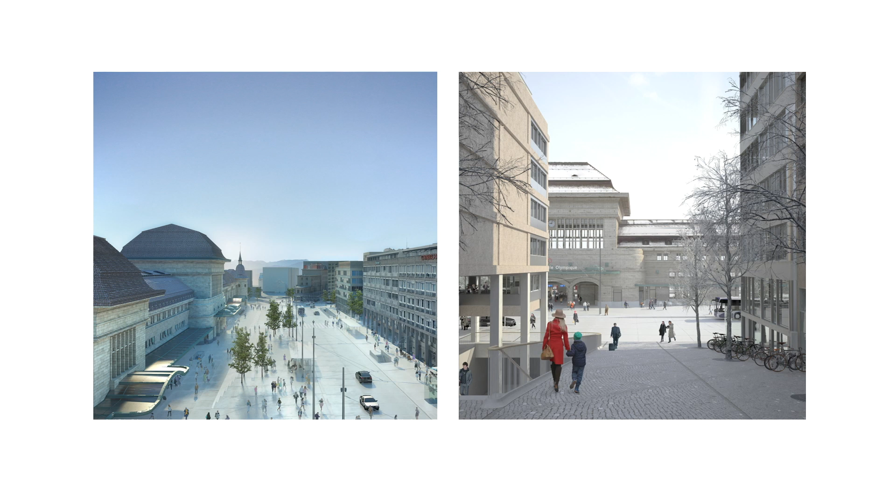It's a subject in Lausanne. This city has many slopes, and we wanted the square in front of the train station to be a flat place, because programs and developments are different when the ground is very horizontal, very flat. So it's not just about moving, it's about other uses that are not linked to mobility.

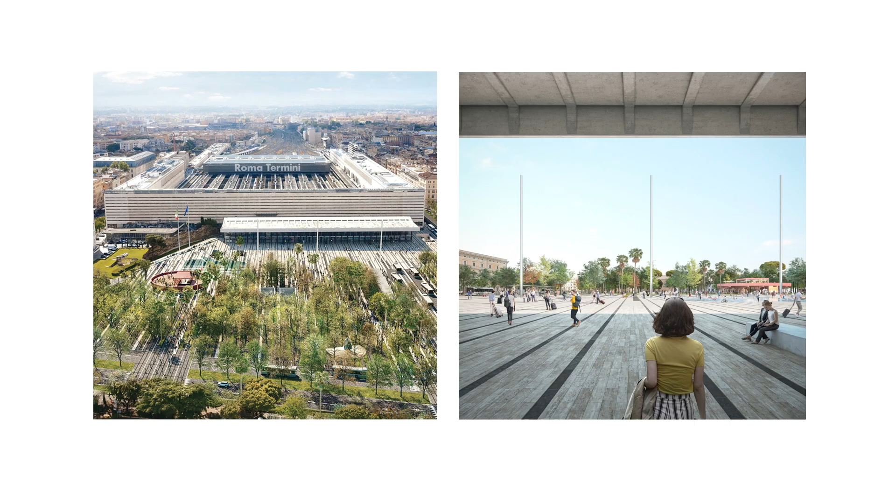A second example, here in Rome, again the square outside the train station, and there's also here an idea of horizontality, flat space, and integrating nature in these public spaces, because they are connected to the nature, to the ground, to the soil, and to the sky. It's about creating specific climates, and we've often talked here and with the SGP to highlight both the social and the environmental role of public space. When you build buildings or infrastructure, there can be very high costs, but for public space it's not the same cost at all.

And finally, with a few images, two different projects in Paris.

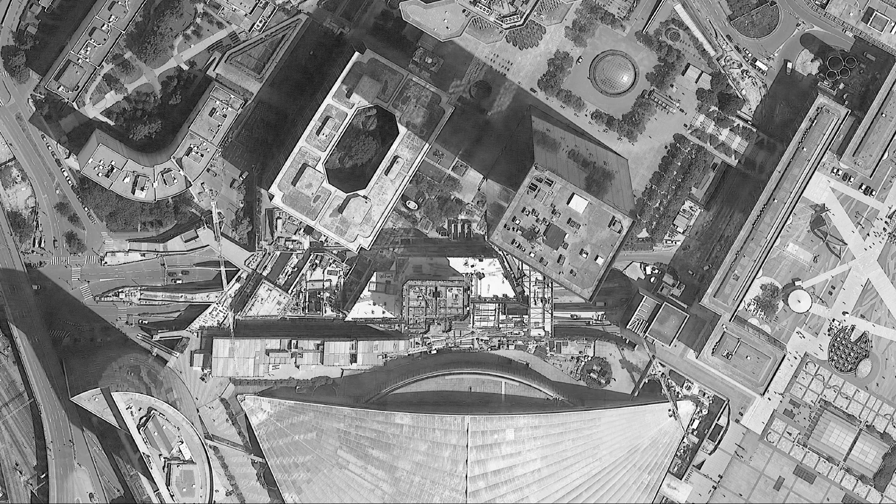When I was called upon for this project, I really pondered about the general environment over there, and I thought: in order to really understand reality as an actual place, it really reminds me of mountains and rocks. It's all rocks, everything reflected from one mountain to the next. It's all rocks and greenery.

I really enjoy hiking in the mountains, and when you're hiking, it all depends whether you're under a tree or not. If you're under a tree, you have shadow, but once you're no longer under trees, you no longer have that shelter. And I thought, perhaps we can transpose this and have a kind of tree line in La Défense.

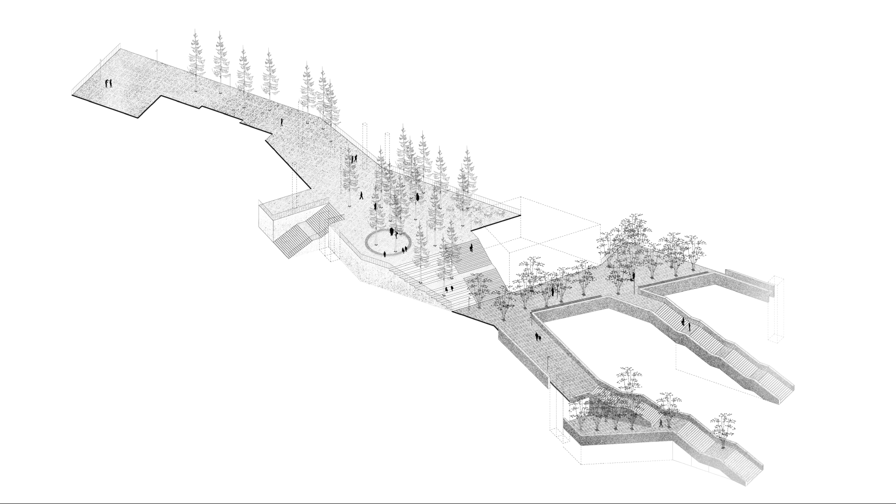Perhaps with these new urban connections, we can plant as many trees as possible. The developer told me the agreement was to plant at least 9 trees. That was my only request, so I had these 9 trees that I had to plant.

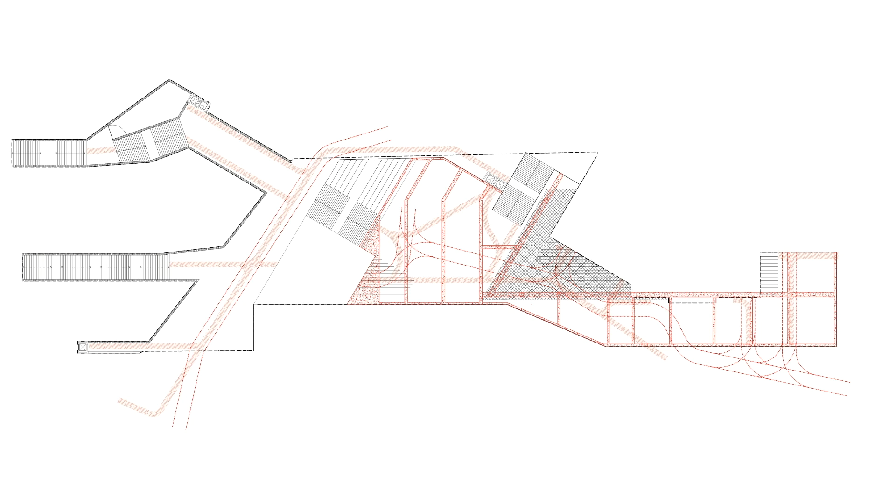I looked at the map and thought, okay, we have that strange shape, we have these beams, no way we can plant there. We cannot plant anything on accessibility roads either, or on lanes dedicated to firefighters. So after two years of harsh negotiations, we were able to identify 53 spots where we may plant trees.

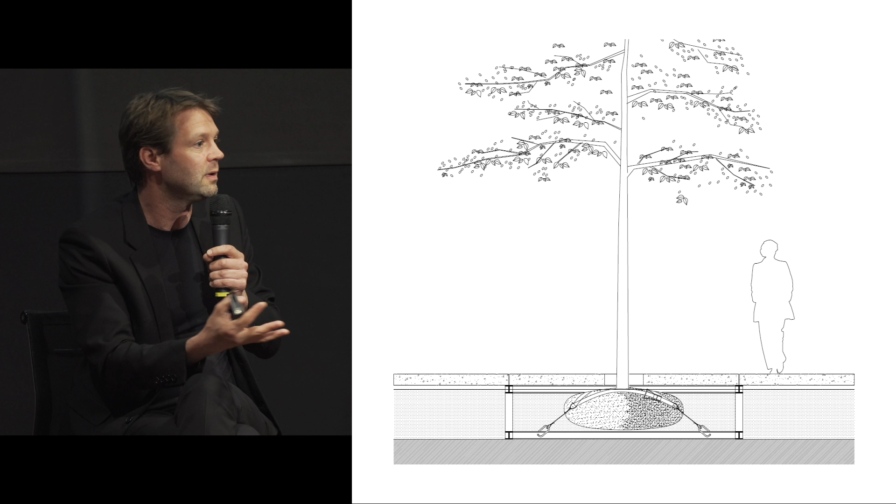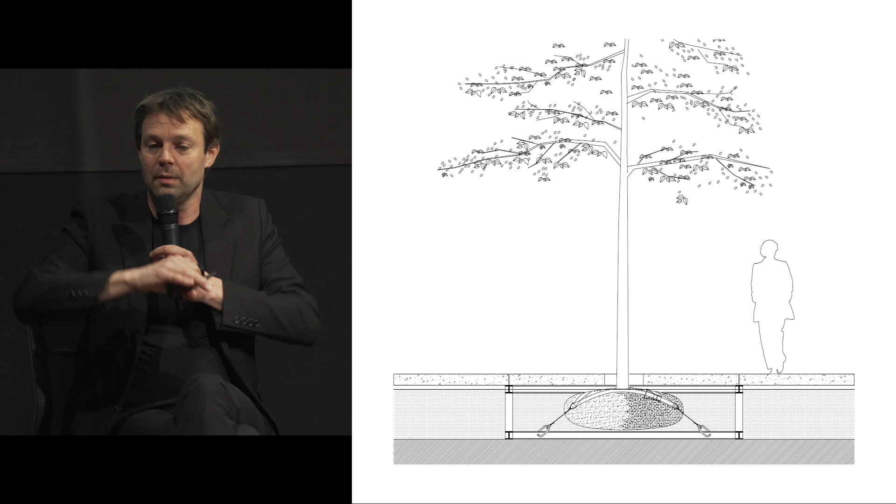He wanted more, I wanted just these 53, and I thought 40 cubic meters per tree was a quite good ratio. So we prepared the trees 3 years ahead in nurseries, and then they were up and ready for D-Day.

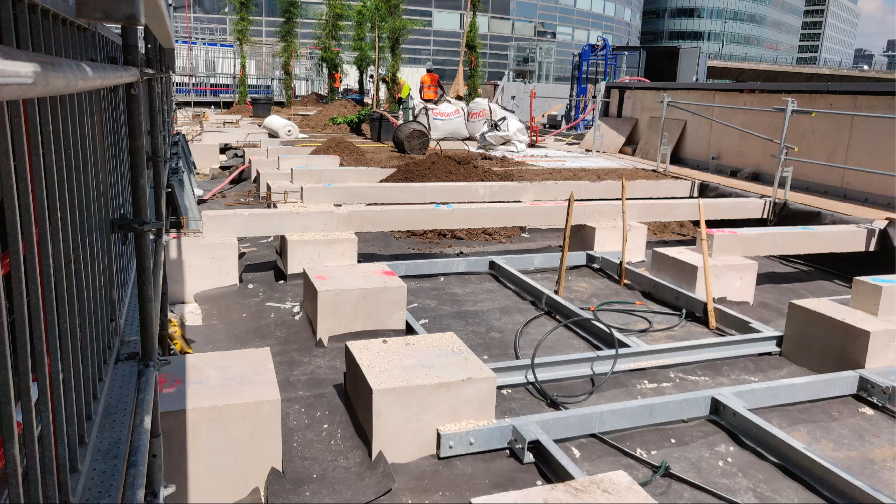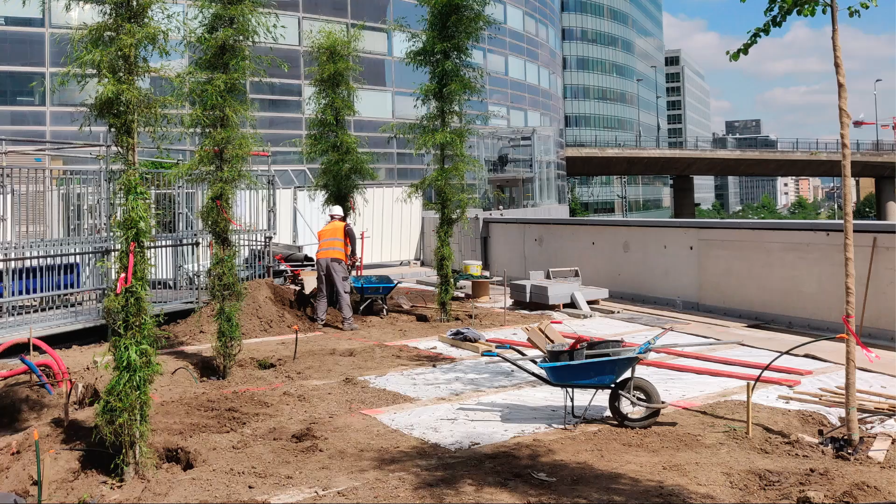On scale, 53 centimeters of continuous soil, and I sketched out the structure myself. Here you have these metallic cages to support trees, and as you can see, it's an ongoing soil cover of 4,000 square meters, or 2,000 cubic meters. Here we have the fertile ground underneath these slabs.

Now they have grown since. They're 15 meters high, they produce shadow, lots of birds chirping in these trees as well. And here they are, between La Défense and Courbevoie.

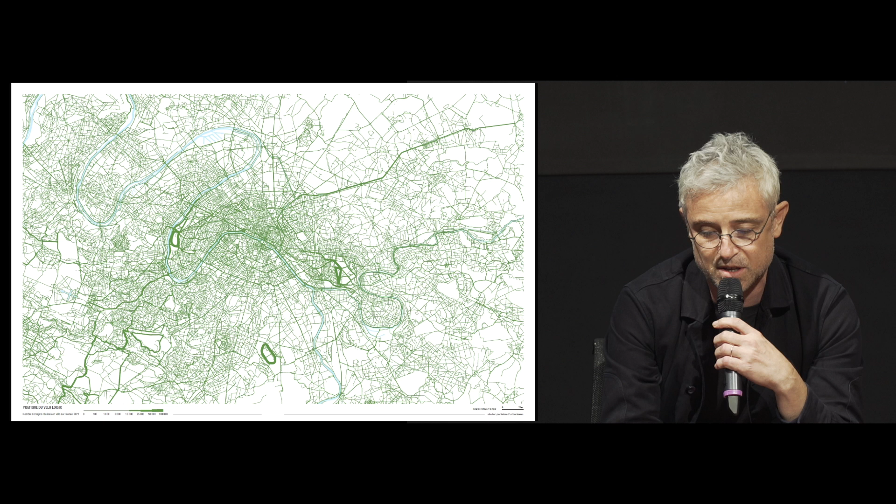There's also 21% less car transportation in the Paris central area. What we've shown is the very powerful dynamic of cycling we see today. Now cycling accounts for 40% of trips by bike, really developed, plus 35% in terms of metropolis-to-metropolis commute by cycling. So that's huge.

2,100 kilometers of cycling lanes are also currently being developed. Number 3, and that was a must with Jean-François Montagne and Dominique Perrault, we have that map of underground transportation, which we started mapping out with RATP data starting from the center of Paris.

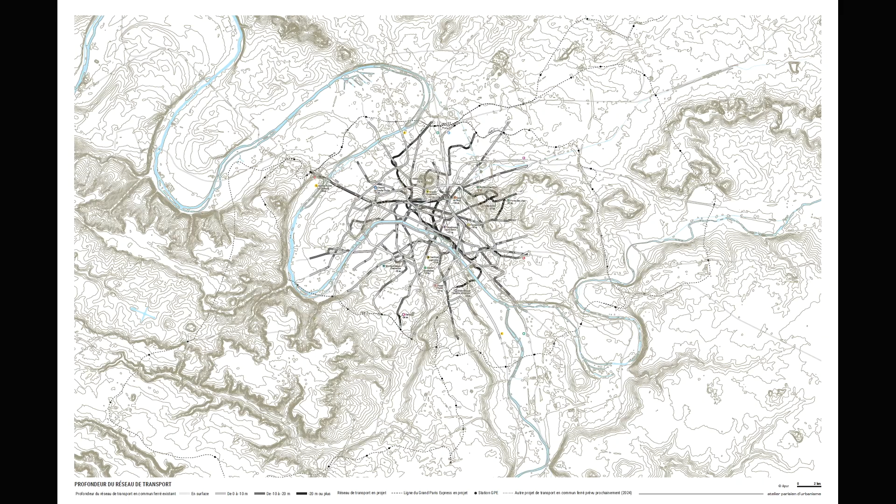So the underground landscape, what does it look like? The idea was to fully map the metropolis in 3D. Line 1 is at -2 meters under the surface, and line 14 is at -25 meters under the surface. The lighter it is here, the more shallow. 4 million travelers per day on average, and for the greater Paris area, 3 million passengers per day. So the scale is completely different, the landscape is completely different.

So tomorrow's mobility landscape, what will it look like? It will be larger in terms of surface area, and with the Cité des Grands Projets, we worked on accessibility to cultural sites in the greater Paris area. The idea was to assess how you may access these sites by foot, 5 or 10 minutes away, and when you also take into account the Grand Paris Express map, you realize there are more than 700 stations.

That's particularly interesting. And the last landscape I wanted to show you, which will be included in that map, is pollution, which should also be taken into consideration when it comes to mobility. That's a landscape that may lead to certain impacts. So here you have the NO2 map. On ground, you're at 40. In just a few years, we dropped the NO2 level significantly.

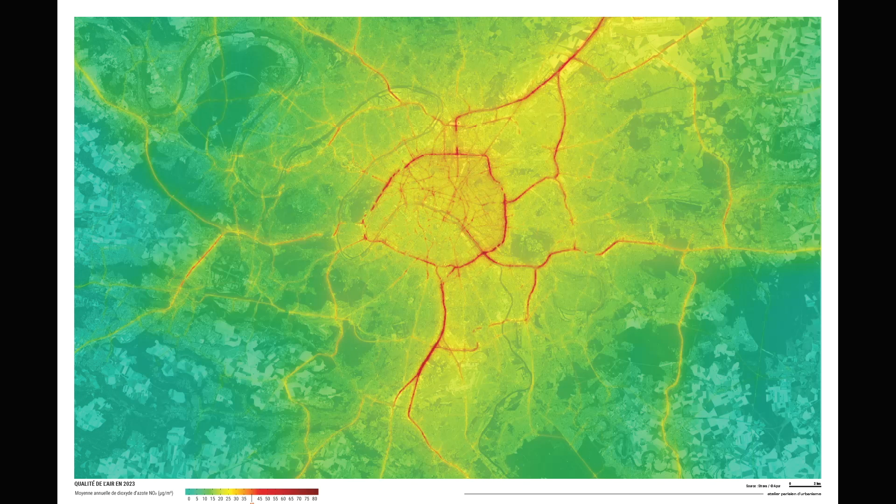We went from -40% along the network. On the one hand, that's due to lower speed on the ring road, and also the increase in e-cars. So now that urban landscape is more and more healthy and serene.

All right. Well, Djamel Klouche, you worked on the Grand Paris consultations as early as 2008. Can you share with us your experience to close that first round of discussions?

All right, yes, I'll try. I'm going to show you a number of older things, perhaps. You know, that picture was taken in this very building 15 years ago, so it all started here, in a way, after the consultation on the Grand Paris project. This is something I really wanted to remind you all of.

It was a rather exceptional milestone that led to great things, including the network you spoke of, Nicolas. I think that residents in Ile-de-France do not quite realize just how transformed their practices have been, and how they will further transform once the Grand Paris Express is fully up and running.

I chose to speak to you about 15 years ago, and back then the question of mobility for the architects in our multidisciplinary team was actually central. How can you move away from the rationale of commute and movement between Paris city center and the outskirts, but rather move towards a suburb-to-suburb rationale? Well, back then we decided to look into Tokyo.

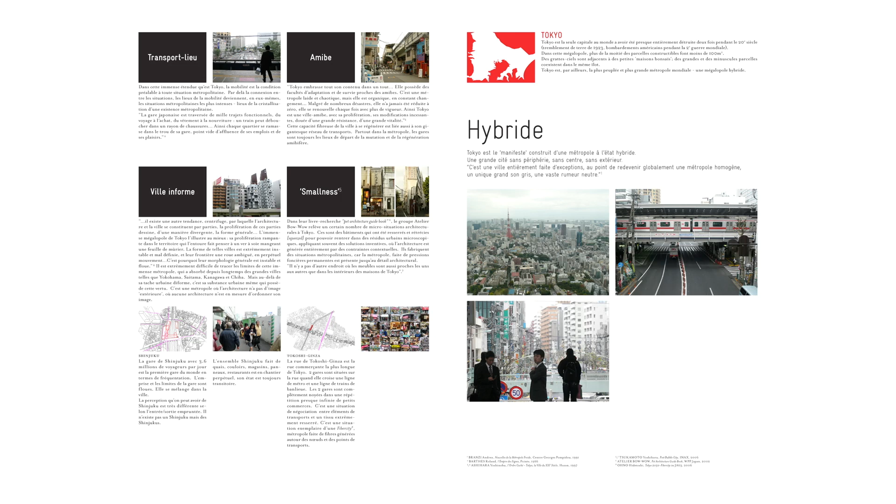We thought that that would be best. But a more pragmatic choice was made back then with Christian Blanc, who was in charge of the Capital Region Secretariat, as I believe it was called. And they said no, it should be an underground network, because when you're at minus 10, 15, or 20 meters underground, you do not have to enter into the same kinds of negotiations. And indeed, thanks to that decision, today we're now opening up the first train stations.

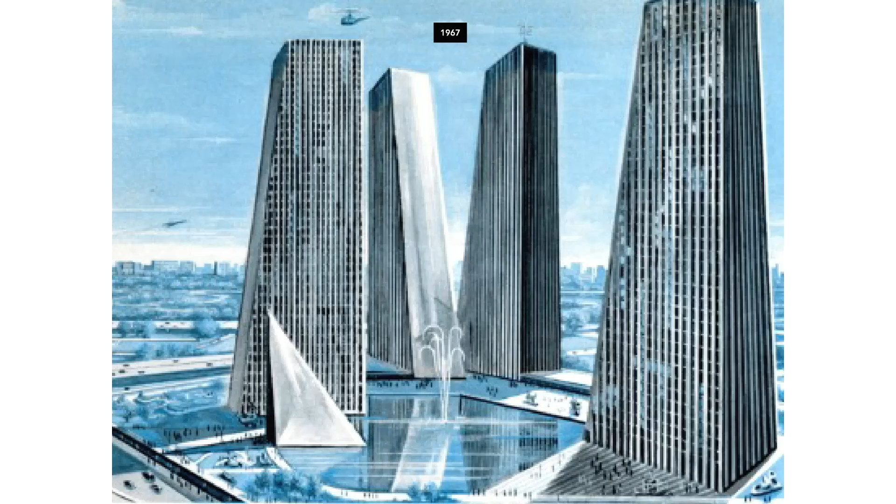Now, let me talk about Pleyel. The Pleyel area is where there was a piano factory, built on that crossroad. As early as the 1960s, this image is from a Paris Match magazine, and that's the kind of vision that they had back then. And now this is what it looks like.

The largest train station of the Grand Paris Express network will be right there in Pleyel. I remember that back then we thought, might as well add another advanced Gare du Nord train station underneath that station, a high-speed station underneath, but it will be a hub even if we don't have that high-speed connection.

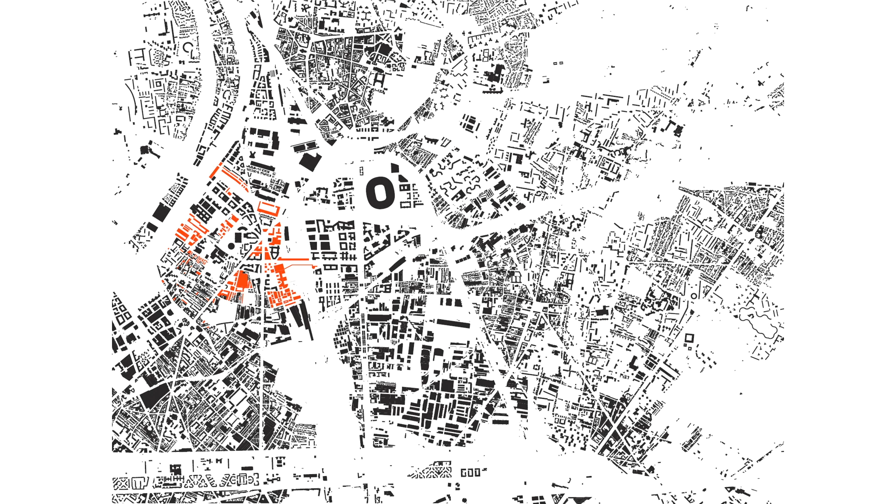On the Seine side, all of that is actually going to happen. We would have never imagined that could happen, but when you're working on mobility, you have two reflexes. Either you may be tempted to concentrate everything into the same spot, or the other reflex, and I think that's what you should prioritize, you want to stretch things out.

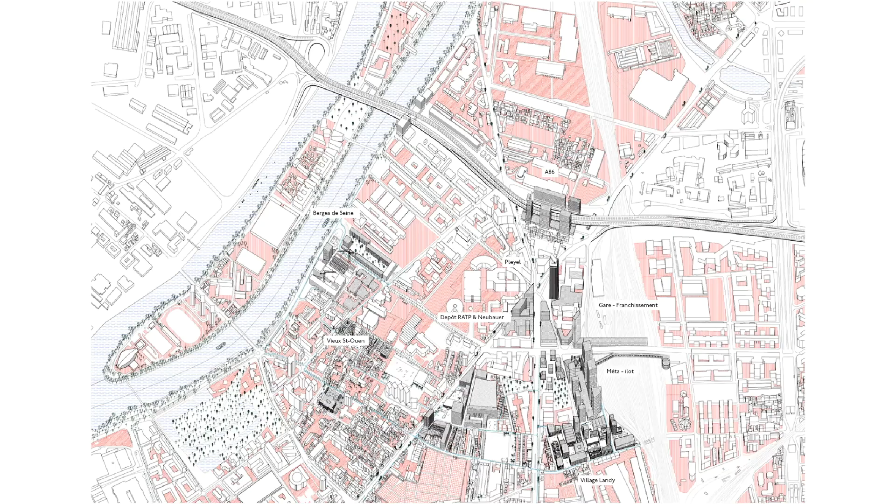In Lyon, with the Part-Dieu station, which is the second largest train station in France after Paris, we really advocated for transportation networks to truly serve cities and urban planning. In order to do that, you really want to multiply access points instead of having that one single spot to enter into the network. You want multiple spots of access to have that metropolitan machine that's much more stretched out to serve the city at large.

And now that we had that bridge, public space enters the discussion a little more clearly. By taking over the existing roadways, we were able to really work on the various access points, and we were able to say that the Grand Paris Express network and the metropolitan fabric can collaborate to fully transform the metropolitan landscape of Paris.

To conclude, here is an image I wanted to show to you. Here I'm on a slightly lower scale, compared with what Alexandre showed us at metropolis level. So you have one train station, various lines, as part of a larger area and territory. Mobility is all about having that.

It's all about playing with dimensions and scales. You really want to have that visibility. In Part-Dieu, we spoke of that easy ground access once you reach the train station, and that was our vision for Part-Dieu. There are multiple infrastructures, so you really want to be able to move around as easily as possible, and understand your connections as easily as possible. You may stop, you may speed up, you may stroll around.

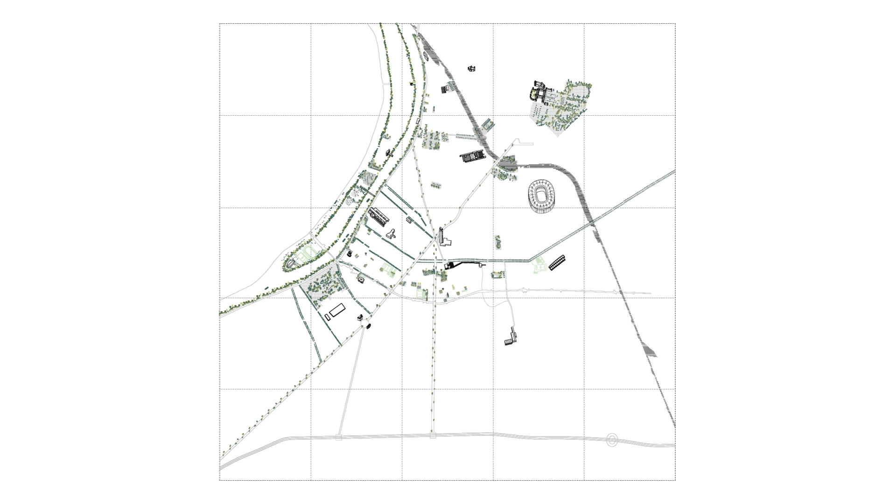And one last image to conclude. Marc Mimram is not here, but he delivered this a few weeks ago, and with that we'll be able to truly connect the Plaine historical area with that crossing. And here we have a mega project of transformation as part of a wider area.

Okay, so since you referred to scaling, and to time and space, the kind of space that we may cross, that we may connect to other spaces. Pierre-Alain Trévélo, if I may turn to you, how can we truly transform infrastructures as part of transformation projects in terms of spatial transformation, in terms of having a long-term vision? I believe that the four of you share that awareness of how you really want to have that long-term vision, that deep vision of a long-term approach. It's quite crazy to see that there is no current representation of the underground surface at metropolis scale. So, Pierre-Alain, in terms of infrastructure, the works undertaken in the past few years, what have they changed in the way that you approach projects, generally speaking?

To start with, these infrastructures make you think of metaphors between infrastructures and geographical structures. Many of us tend to do that, and it's quite fair, actually. Perhaps it's relevant because infrastructures are born out of a certain program, and historically that program may disappear. Military infrastructures are a good example. But these formerly military infrastructures remain as foundations in the longer term, which has made it possible for the city to renew itself over time.